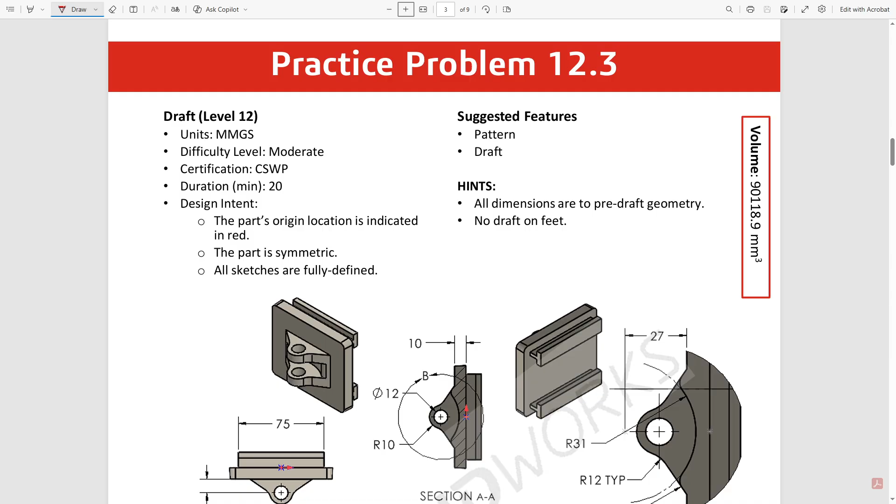Hi, my name is David, and I'm going to walk you through how I solved the CSWP practice problem 12.3.

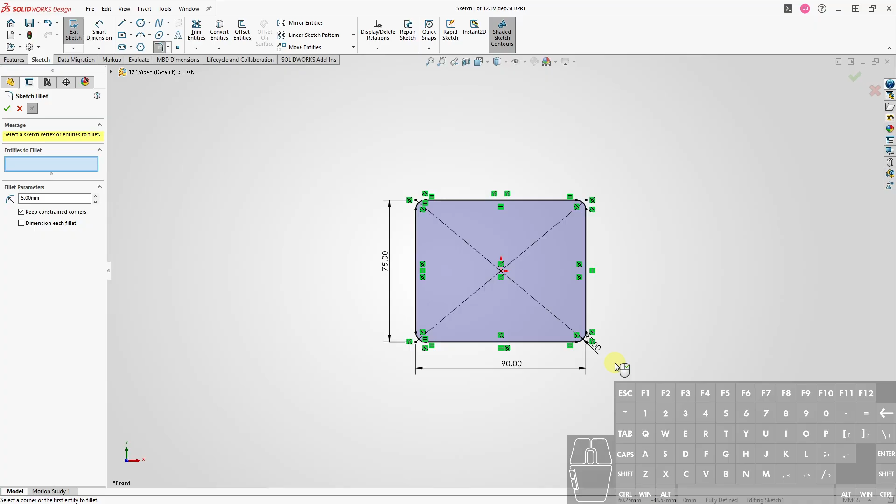So we'll jump in and make this filleted rectangle and extrude it up 10 millimeters. The rectangle is 75 by 90, and we're going to do this in the front plane. We'll fillet it with a radius of 5 millimeters, and extrude that out 10 millimeters towards us.

Okay, so now we want to look at this shape right here, which is kind of like a triangle with a little bump. The way we're going to approach this is, first when I tried to approach this, I made a line here, then an arc right here, then another arc here, then another arc here, and then a line. That seems to be what's going on, but the problem is I couldn't get that part fully defined.

So I had to go looking for some other assumptions. I tried making this R12 arc, filleted later, and first focusing on this arc right here, which I ended up drawing a circle for. Then the lines going into the little nodes, the little vertices of the circle on the top and bottom, or left and right depending on your orientation. So let's get started with that part.

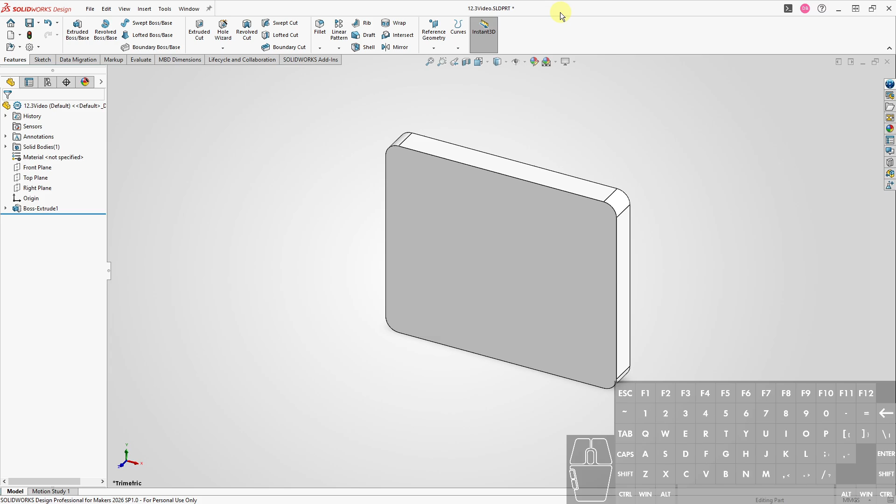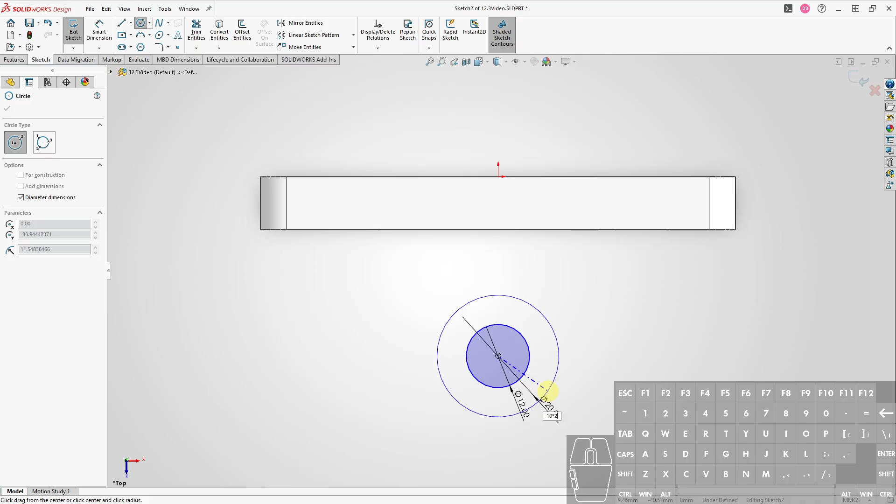We'll go working in the top plane, and I'm going to draw the part out here. Basically creating a circle first with diameter 12, and then another circle which looks like the radius is 10, so times 2 is 20. So here are the two that I'm looking at: the circle with diameter 12, and then this arc with radius 10, but I'm creating it as a circle, so I need to enter the diameter, which would be 20. So that's these two things here.

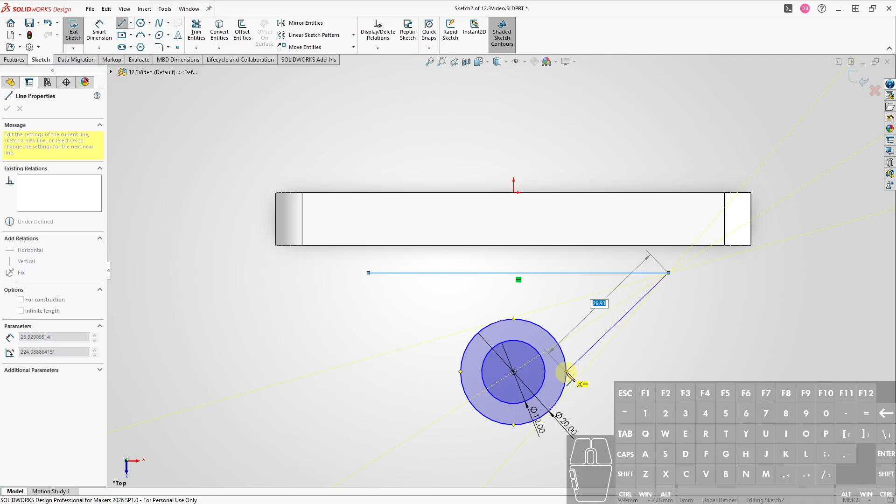And then I'm going to create some lines. First I'll create the line that's going to line up with this edge here, but I'm just drawing it off to the side for a moment. Then this line I'm going to make go directly into this node here, this vertex. There it is. And then we're going to make another one symmetrically, going into this node here. Again, this is a bit of an assumption, but it seems to be getting very, very close to the correct answer—off by less than a cubic millimeter.

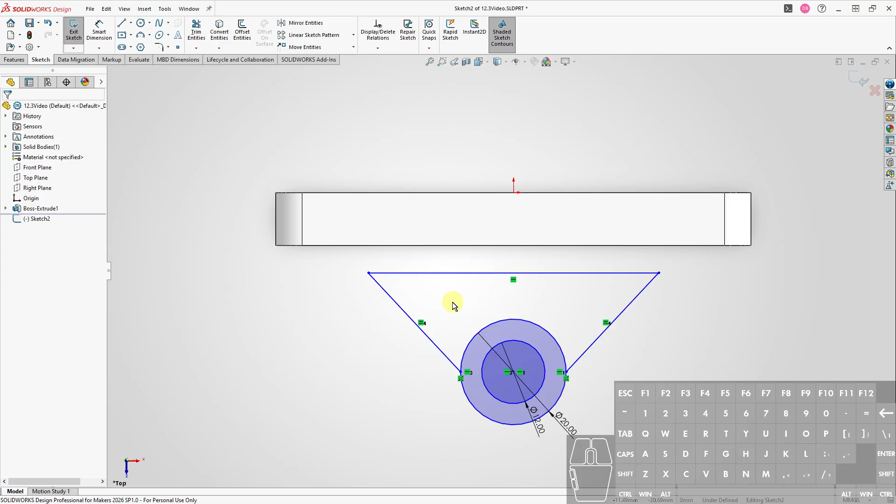So these two lines, just by symmetry, are going to have to be equal. I'm going to select these and make them equal in length. Also, I want this center to be lined up vertically with the origin.

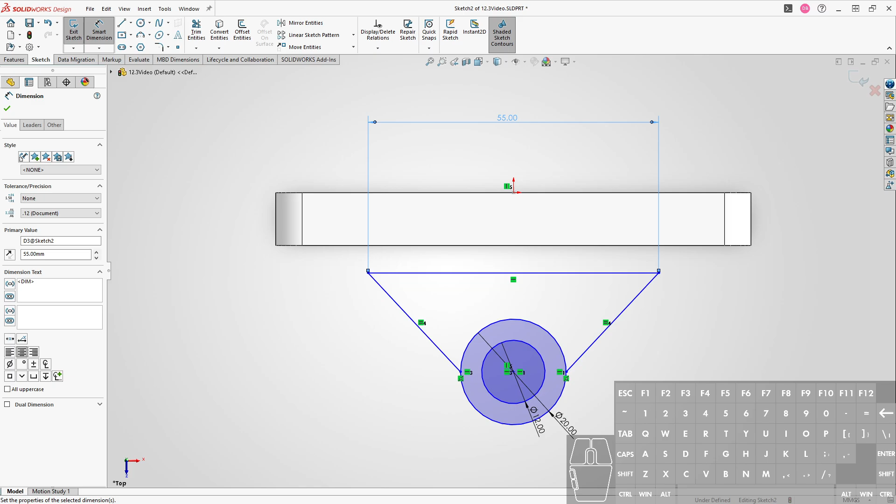So that's good, and then we can also start dimensioning a little bit. This dimension here is 55—we can see that from this picture, 55 across. And 27 is not for this part we're drawing, that's for when we cut away part of it. The other dimension we need is right here: it's 12, so from the center out to this edge is going to be 12. From here to here is 12.

Another thing too, I can get rid of this line—let me just trim it off. There we go, we don't need that. And these arcs here, again, I'm going to be filleting later in 3D. So one last thing to do, make this edge collinear. And now we can see we're fully defined.

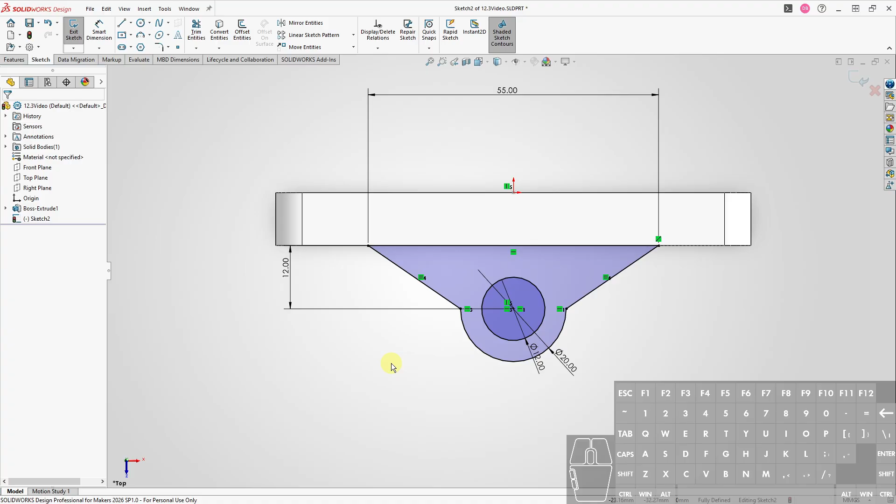So that's looking good. With this sketch, we're going to do a mid-plane extrusion—so mid-plane, and we're going to go up and down 35.

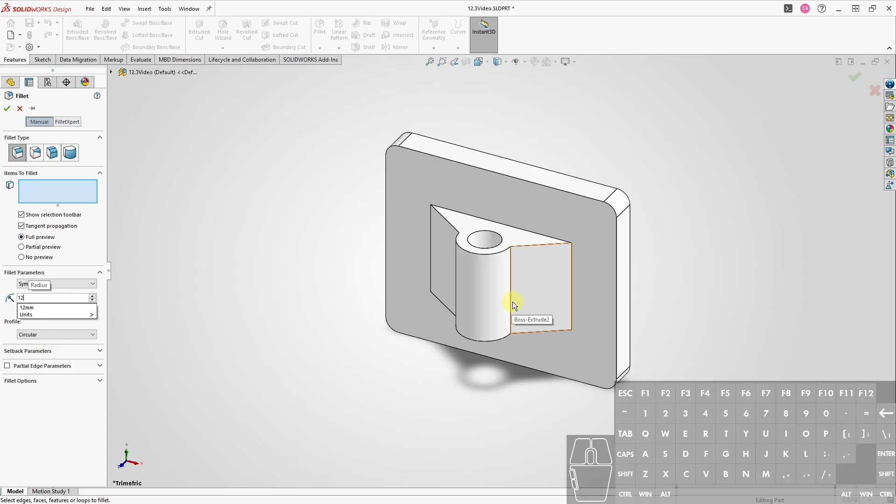So that's this 35 right here. Now what we can do is put those fillets in. The R12 fillets going down this way and on the other side as well. That's going to be on this edge here and the other edge over on the other side. So fillet 12, this one, and grab the other one. Perfect.

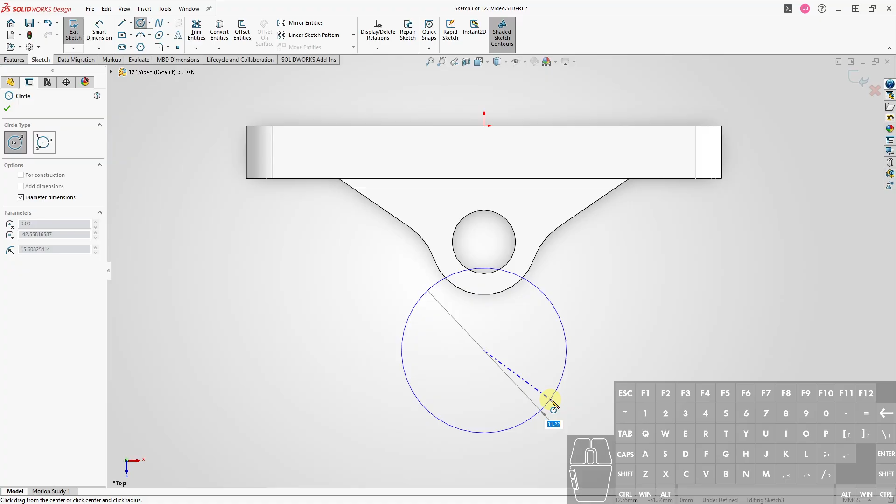Okay, looking good. As a next step, we're going to create another sketch in the top plane and draw a circle so we can cut away the middle of that little part. Let's draw the circle with radius 31, so diameter twice that. That's this circle here. The center of that circle is going to be 27 away from the edge here. It's also lined up with the origin. You can just barely see the origin right here.

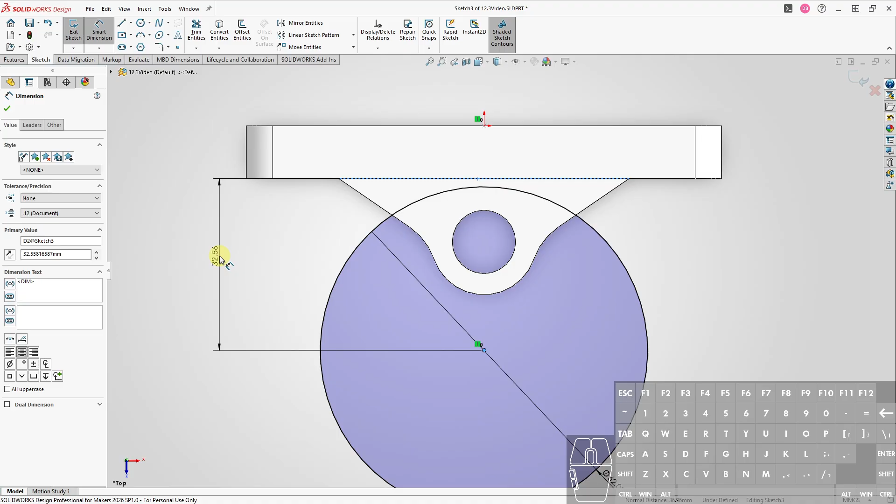So line it up with the origin, and then make sure we're 27 away from this edge here. Oops, I did 37. Okay, so it cuts into this extruded filleted rectangle a little bit, and that's okay.

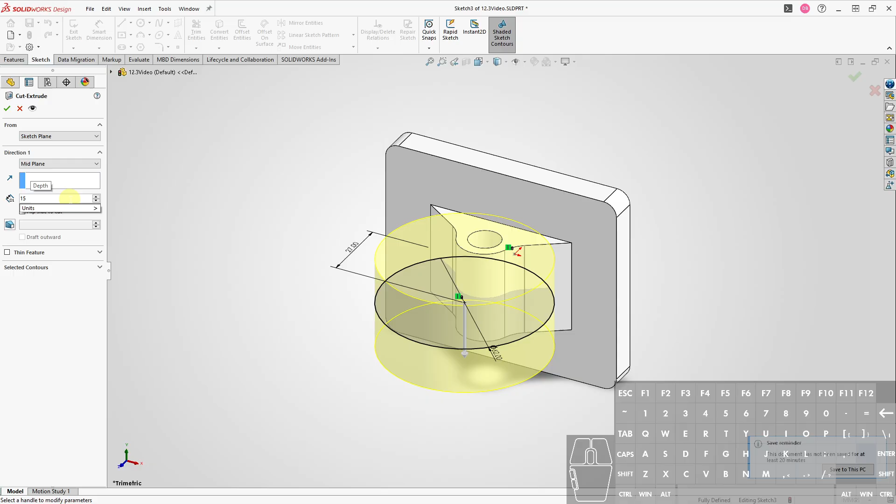All right, so we're going to do a cut. Where's our cut? Right there. Mid-plane, and this one's going to be up and down 15, or 15 total. And that's from right here, 15. So there's one other thing we have to do, which is these right now are sharp, so we need to fillet with radius of 5. That's going to be here and here.

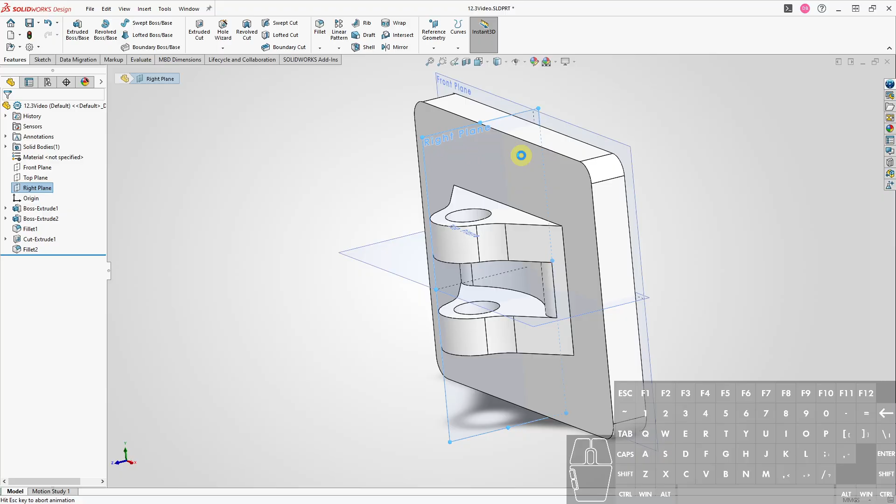Okay, looking good. Let's look at the feet in the back. For the feet, we're going to work in the right plane. Let me just go over to here. So we need to create this little T-shape thing going on here. It looks like it's symmetric, so we're just going to draw a center line and then draw half of it. I'll draw that off to the side and then lock it down in place. It's going to end up being 21 from the end of this T here up to the origin.

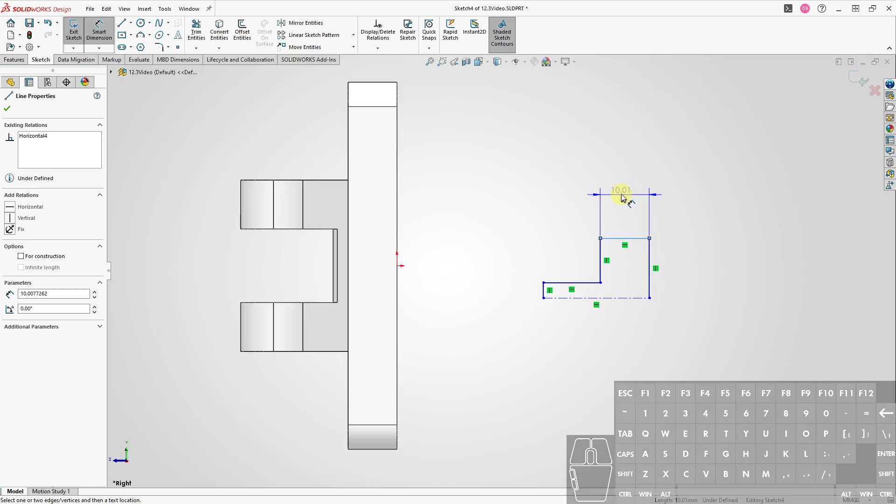So let's draw a little center line, horizontal center line, and then just start drawing half of it. There we go. And for dimensions, this guy is 5 from here to here. So this guy here is 5.25. And then from here going across the center line is 14. And then this guy here, oops, accidentally had something else selected. So this guy here is 8.5.

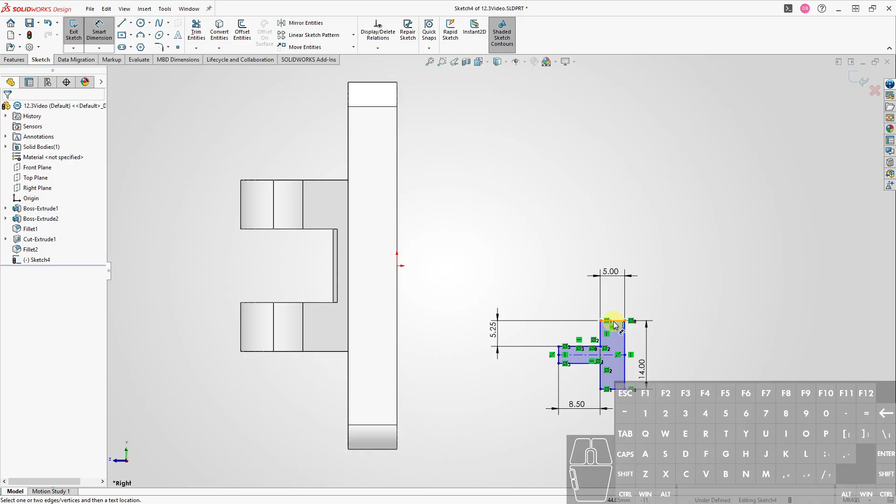And all of that we can mirror about the center line there. Okay, so looking pretty good. Let's go ahead and make sure that we are the correct distance from the origin. This is going to be, what did we say, 21, I believe? Yep. And then we'll make sure that this is locked onto this edge.

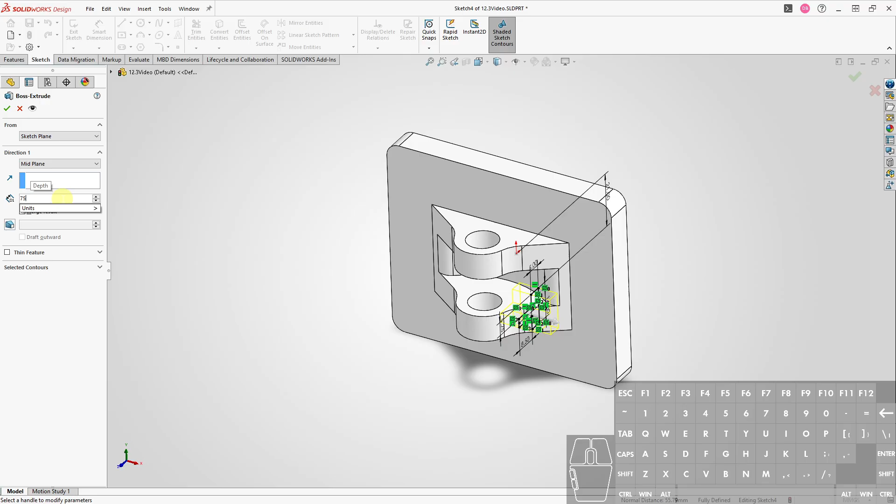And we're fully defined. Okay, so now we can extrude, another mid-plane extrusion, and we're going to go 75 in each direction. You can see the 75 from this view here. And there's another copy of that track up on the top, so I'll select this guy, do a mirror about the top plane, and hit enter, and now we have the other foot.

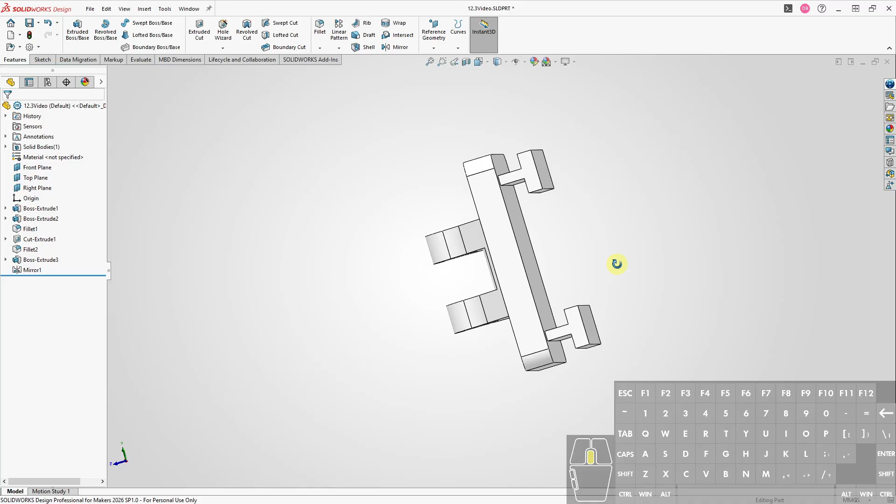So, looking good. Let's check the mass. Oh, one thing we forgot. Almost forgot the entire point of this, which is all draft 3 degrees, typical. Okay, so we got to figure out what to draft. And the filleted rectangle we could have drafted while we were doing the extrude, but let's go ahead and just draft everything here. Or you know what, let's go back and change that. Let's add the draft right now to this boss extrude.

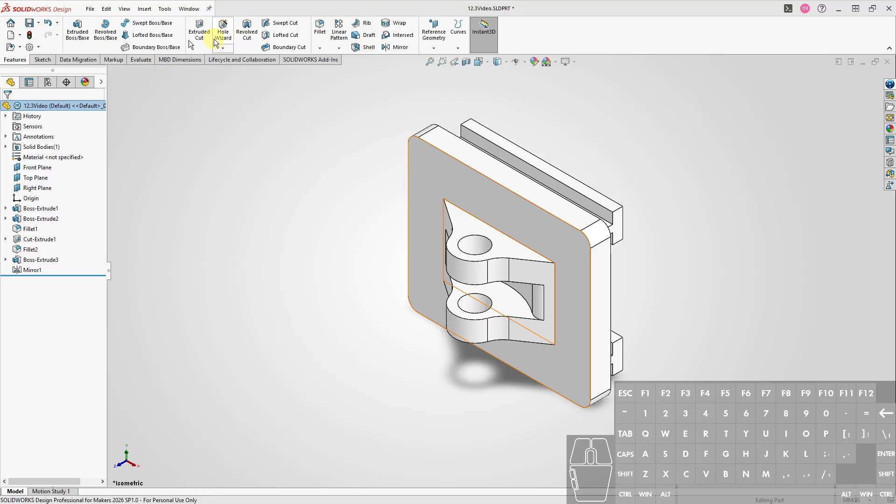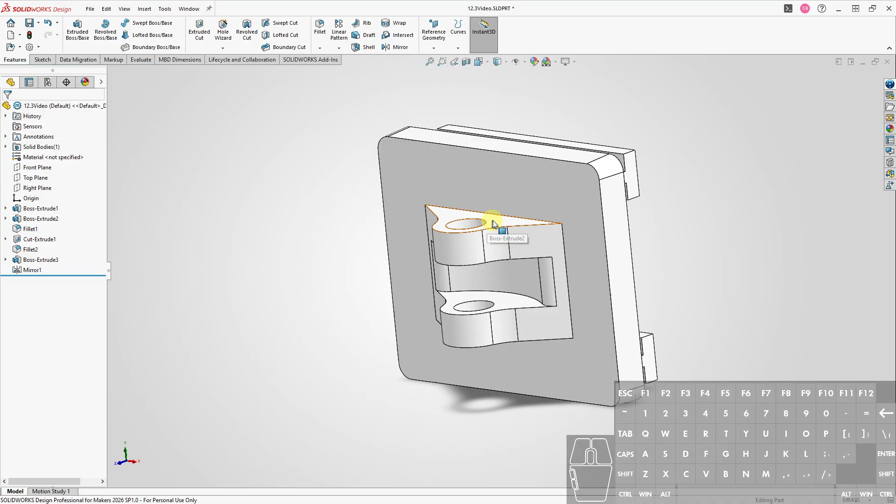Okay, we'll add the draft just so we see it, how to do it like that. Okay, so there's our draft. You can see it happening, that narrowing. Just barely see that narrowing happening. And then the other surfaces to draft are this surface, and then the other two. So we'll do those with the draft feature.

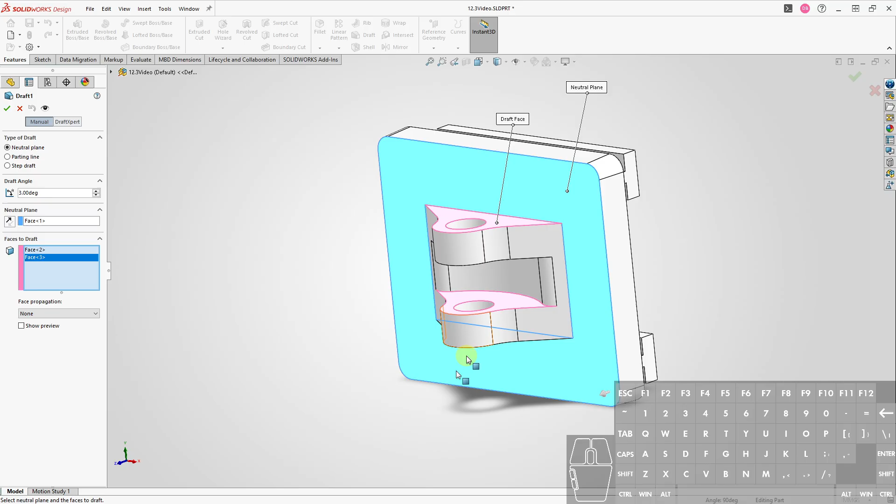So the neutral plane will be this plane, and in fact it calls it out right here. The neutral plane is this guy right here. It's sort of the end of the filleted rectangle extrude. And then the faces, 3 degrees, and then the faces to draft are these guys and these guys. All right, there we go.

So our volume is 90119.05. And the answer here is 90118.9 cubic millimeters. So we're basically there. It's only off by a very, very tiny little bit.